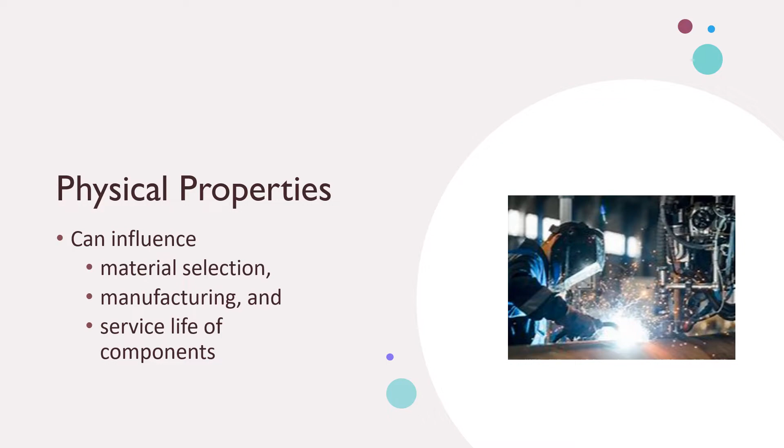Physical properties also have effects on product design, on service requirements, and on compatibility with other materials.

So here you're thinking about the material to make a product, and the physical properties of these materials. Your material has to be compatible with your tools, your dies, and your workpiece. For example, you can't use a die made of material that is lower in physical property than the material you choose. So you have to compare, and your material, your tools, your dies, your workpiece, they have to be compatible, right?

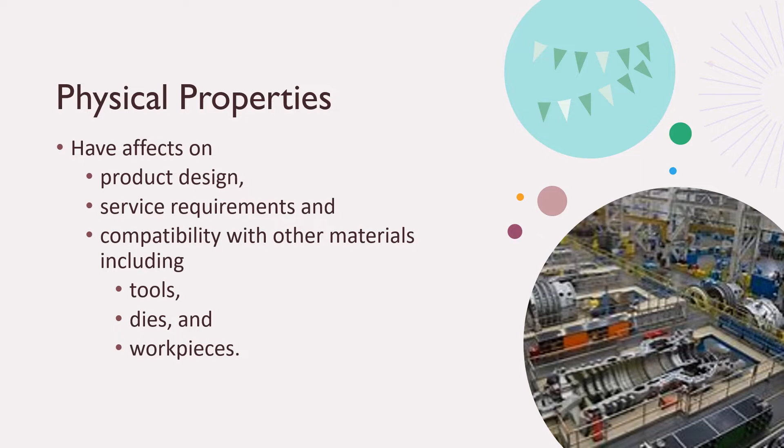Okay, and your strength to weight. So when you think about product design, this is what we always think about: the strength of our product, and the weight of the product. So we study the physical properties of the material.

We look into ratios too, right, stiffness to weight, strength to weight. These ratios are extremely important, and their combined properties are important.

So what are we doing? We need to know them in order for us to be able to select the right materials, especially for lightweight structures like airplanes, high performance structures, and many different products that we need. Again, two ratios: strength to weight, and stiffness to weight.

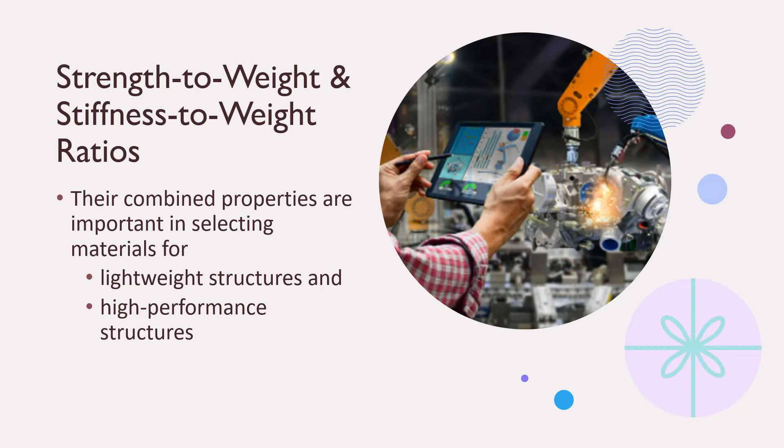Alright, so the next physical properties are thermal conductivity and thermal expansion, because of heat your material expands, and your material can carry heat. So they play major factors in the development of effects that are important in tool and die life, in various manufacturing operations, like thermal stress, thermal fatigue, and also shock. So those are the effects that come out from these two physical properties, thermal conductivity and thermal expansion.

And again, your foundation dealing with heat, that's your physics. So those of you who haven't taken physics, I've been teaching you so many times what's going on inside of the material, the internal structures of the material. They're moving, moving in their own ways, not our ways, but moving.

And every time they move, something is going on, and that's your electron. We talked about it, the flow of your electron is your current, right? So electricity is conducted, and some form of thermal energy is conducted, and because of that your material moves. Every time they move you can see the expansion, and sometimes you get stresses because that movement is going on all the time, and of course it's going to give you stress in your material.

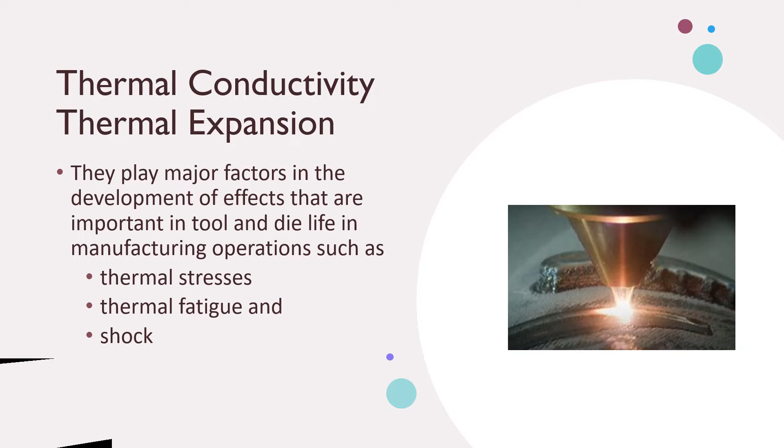And then we will get into oxidation, corrosion. So they are, of course, every time we think about oxidation and corrosion, chemical reactions, and they're important.

Again, material selection to make your product, and design, of course. The design is literally shaping our material, and depending on the shape, this can happen over time during manufacturing as well as in the service life of components. Every product has a life, and we don't want oxidation or corrosion on the surfaces of our product. So they're very important to consider every time we select the material, every time we design our product, during manufacturing processes, and also in their service life.

Alright, then we get into passivation and stress corrosion cracking. These are just phenomena, and we can see them in material selection, in design steps, also in manufacturing, and also in the service life of these components.

So meaning, when you have corrosion, just a chemical reaction in your product, it can stretch out, and because of that stretch, you can get a crack inside of your product, sometimes on the surface. So you've got to consider these physical properties again for these four things: material selection, design, manufacturing steps, and the service life. We call that the passivation, stress corrosion, cracking phenomena that is important. They are very important to think about, meaning we have to be careful about the physical properties of the material, and one of them is this.

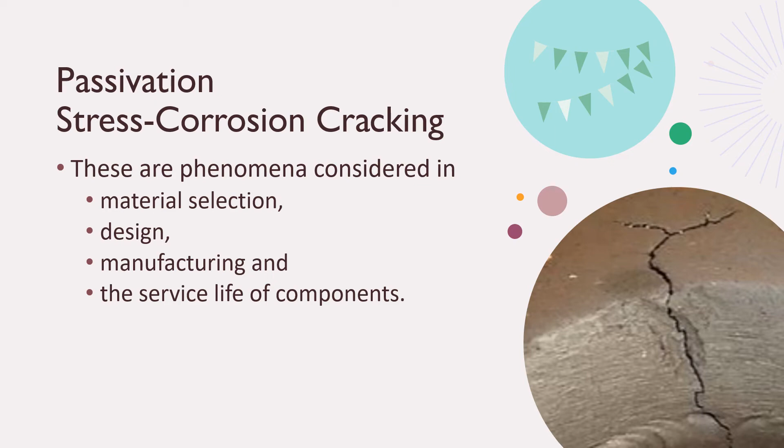On the next two effects and physical properties that we have to pay attention to: your magnetostriction, and the other one is piezoelectric. These are just physical properties, and we use them in manufacturing processes and their control.

So you might want to review what magnetostriction is. It's nothing but your sample, or your material, is magnetized, and then you're able to see its effect.

So piezoelectric is nothing but you're going to see some electric charges, and sometimes they accumulate or stay in, especially in solid materials, like ceramics, in a material.

Then we want to see what happened to all these effects. So how can we see them? The first one is your magnetostriction effect. You can see this effect in ultrasonic machining of materials. That's the way we can be able to understand the magnetostriction effect. So if you think about magnetostriction, where your sample is magnetized, you can be able to see it in ultrasonic machining.

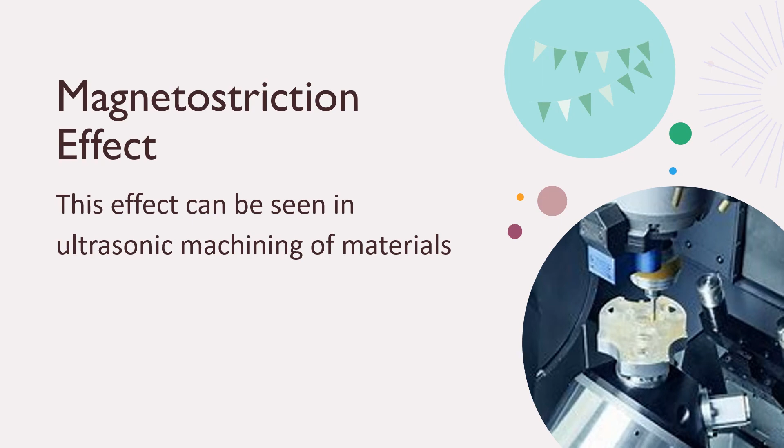Piezoelectric effect, so where can you see them? You can see this effect in transducers and also in various types of sensors. For a transducer, it's a force transducer, that you can be able to see this type of piezoelectric effect.

So for the general summary for your chapter 3, physical properties, if you can recall: strength to weight, stiffness to weight, your thermal conductivity, your thermal expansion, your oxidation, your corrosion, and they're very important because they can influence material selection, design, manufacturing, and your service life. And if you can remember that, you are good. And of course, pay attention to your magnetostriction and piezoelectric effects. Alright, that's it for this chapter.